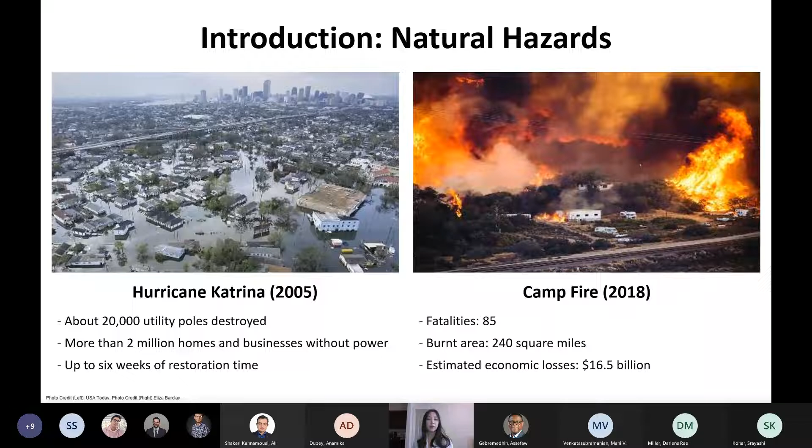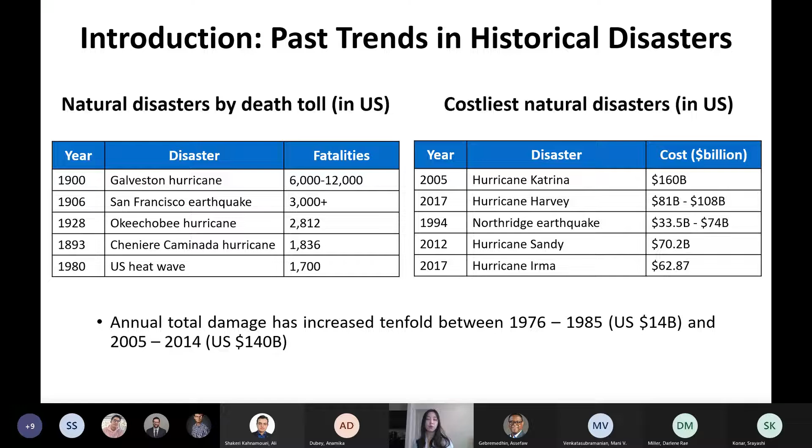And similar observations were found around the world. Annual total damage increased tenfold between the period from 1976 to 1985 and the period from 2005 to 2014, from $14 billion to $140 billion. Then what are the main causes for this trend? The possible answers to this question can be found in the next slide.

So the human losses resulting from natural hazards have decreased significantly over the last century due to improvements in building design standards and construction practices, improved disaster forecasting, and timely public warnings, all of which could be achieved through advanced technology and improved understanding of hazards. However, economic losses have increased dramatically in the past decades and are expected to increase in the future due to increasing risk, such as population growth and urban development in hazard-prone areas, as well as global climate change.

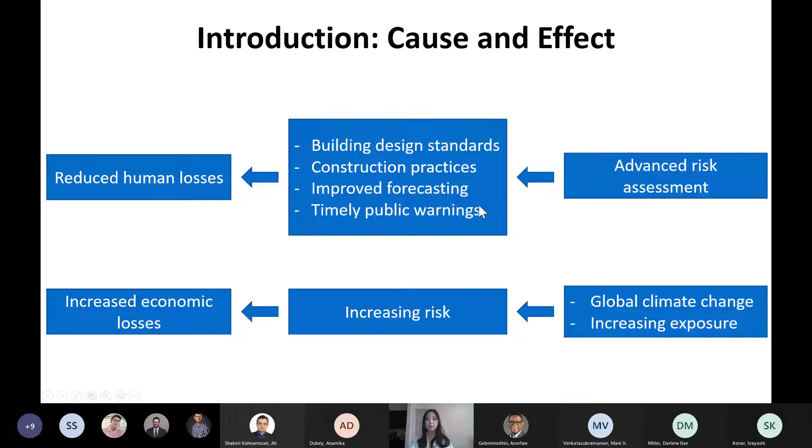And the importance of appropriate risk management and risk-informed decision-making for disaster preparedness can also be found from the comparison between the 2010 Haiti earthquake and the 2010 Chile earthquake. The January 2010 earthquake in Haiti had a magnitude of 7.0 and caused 230,000 fatalities. This earthquake destroyed Haiti's economy, and infrastructure had been recovered very slowly.

But by comparison, the magnitude of the 2010 Chile earthquake was 8.8, which was the fifth largest earthquake in the world since 1900, releasing about 500 times greater energy compared to Haiti's earthquake. However, Chile's death toll was 550 fatalities, which is 400 times less than the fatalities of the 2010 Haiti earthquake. Then how was it possible?

It was because Chile had a better understanding of the earthquake risk, which resulted in better building codes and earthquake-resistant construction before the earthquake event, and the strategic implementation of policies that address both the immediate recovery needs and long-term planning. As such, risk assessment and management play a vital role in reducing human and economic losses, as well as the social disruptions from disasters.

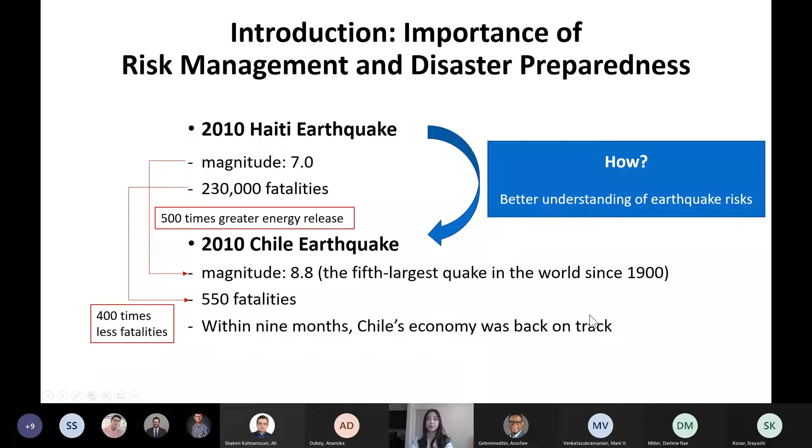Okay, then before talking about the risk assessment, we first need to define risk. And risk is a combination of three components, including hazard, exposure, and vulnerability. And hazard is a potentially destructive physical phenomena, including the natural and man-made hazard, such as earthquake, hurricanes, tornadoes, flooding, wildfires, tsunami, volcano eruption, and even the intelligent attacks.

And exposure is the elements at risk that could be affected by the hazard, including the people, buildings, infrastructure, and the environment. And the vulnerability is the likelihood that elements will be damaged when exposed to a hazard. So for example, a building with multiple stories will be more vulnerable to the ground shaking from earthquake than a one-story building. And another example is that an elderly person may be more vulnerable to the impacts of flooding because he or she has more difficult time in evacuating or moving quickly. Therefore, in order to assess risk, these three components should be defined first.

So from an engineering viewpoint, the risk-informed decision-making has the four basic steps: risk identification, risk modeling, risk assessment, and risk management. So in the first stage, we can identify the three risk components, which are hazard, exposure, and vulnerability, as I mentioned in the previous slide. And then the second step is to develop or simulate the stochastic models of the identified risk components.

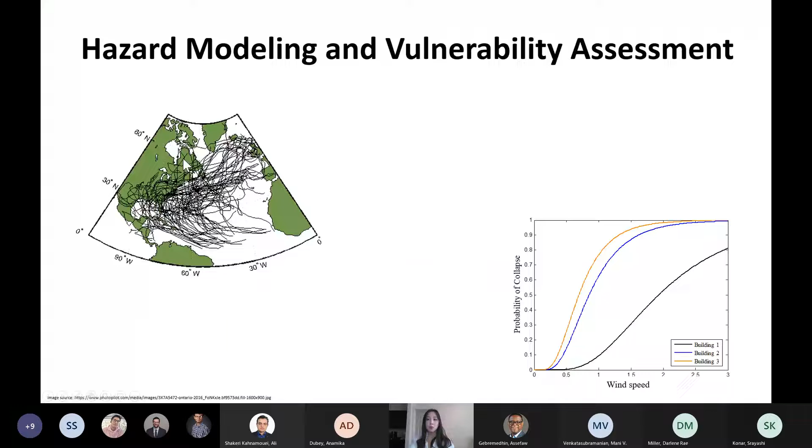And to model the hurricanes, we can generate a large number of hurricanes from their initiation over the Atlantic Ocean to their final dissipation after making landfall. So we can record the number of hurricanes hitting the community per year, and then we can also record the intensity of each hurricane. So this is the procedure for generating the stochastic set of hurricanes.

And then we also have to investigate the vulnerability of the buildings. And then we also have to consider some vulnerability of the people and the natural environment. But during this presentation, I'm gonna focus more on the physical aspect of the community. So here, the vulnerability of the buildings can be represented by the fragility curve. And I'm going to talk about the fragility curve in more detail later in this presentation. But here, each building has different vulnerability due to its own dimension, like the floor plan, layout, construction material, and different structural behavior.

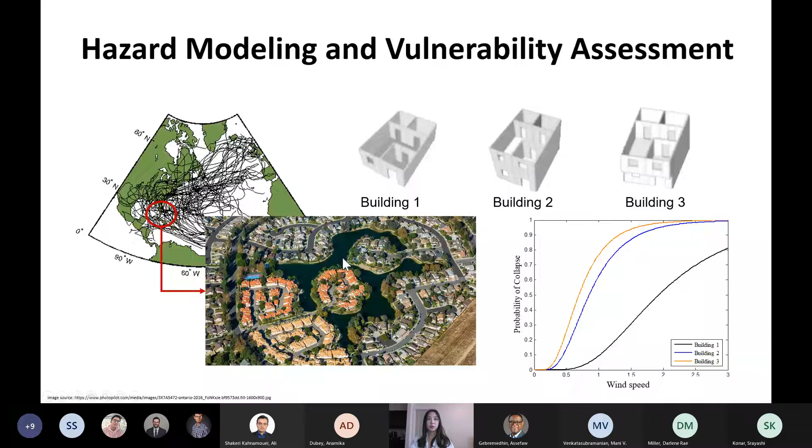And then the final step is the risk management. So we can make some decision based on the risk assessment and other constraints for the purpose of mitigating risk and/or improving the resilience of the community.

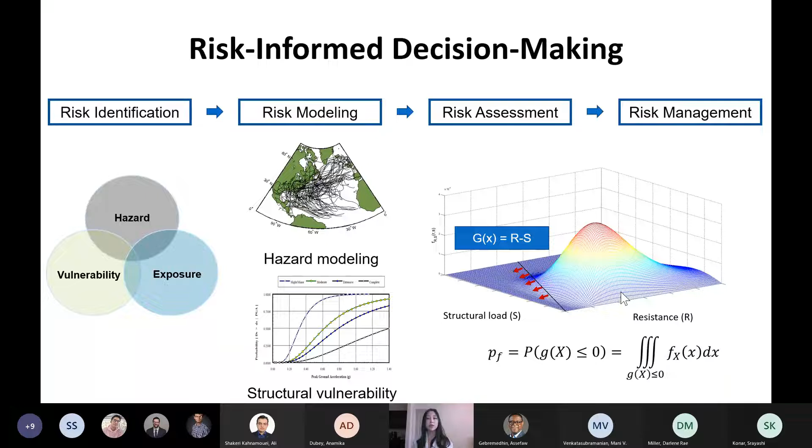And as many of you have already heard, resilience is a hot topic in many different disciplines. And the concept of resilience has received great attention in recent years due to the repeated natural hazards and their high consequences to humans and the built environment.

So resilience can be broadly defined as the ability to prepare for and adapt to changing conditions and withstand and recover rapidly from disruption. And resilience capacity can be classified and categorized into these three parts. So first, absorptive capacity is the capacity of the system to absorb and resist the impact of perturbation and to minimize the negative impact of the disruption.

And second, adaptive capacity is defined as the ability to successfully respond to future changes and conditions by adjusting to potential damages and taking advantage of opportunities. And lastly, the restorative capacity is the ability of a system to be restored quickly and efficiently in case the absorptive and the adaptive capacities are not sufficient, and the system cannot maintain an acceptable level of performance. Then how can we quantify the resilience of the system?

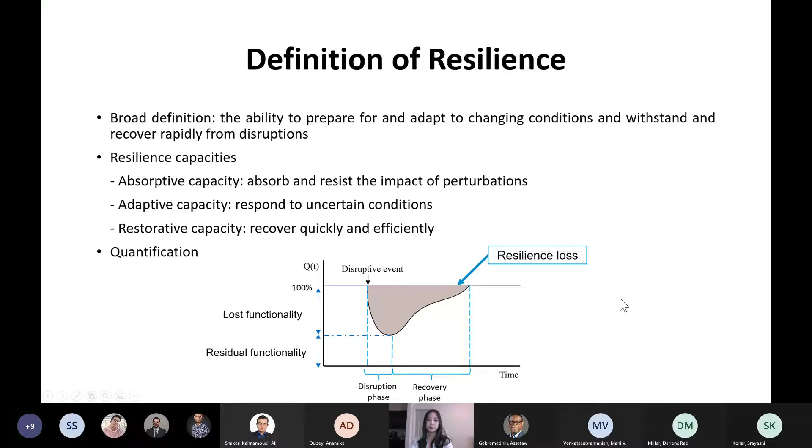In today's seminar, I'd like to introduce one of my recent studies on multi-component resilience assessment for a supply chain system to illustrate how risk and resilience assessment can be used at the system level. Although this new resilience assessment framework will be illustrated with a supply chain system, the general framework I'm going to propose can be applied to other types of infrastructure systems, such as electric power grids, water distribution systems, transportation systems, and so on.

Okay, then what is a supply chain system? A supply chain is a complex network system involving the whole process from the production of source material to the delivery of a completed product to the end users. It also includes all the individuals, resources, technologies, organizations, and activities in this process. Here I'm going to focus more on the physical aspect of the supply chain system.

The supply chain system can be modeled as a graph consisting of different sets of nodes and links. As you can see from this figure, the supply chain has different types of nodes, such as the raw material production node, refinery, oilseed crusher, or storage, and the final destination node, and the links between the supply chain nodes are the transportation routes to deliver the product from the raw material production node to the final destination node.

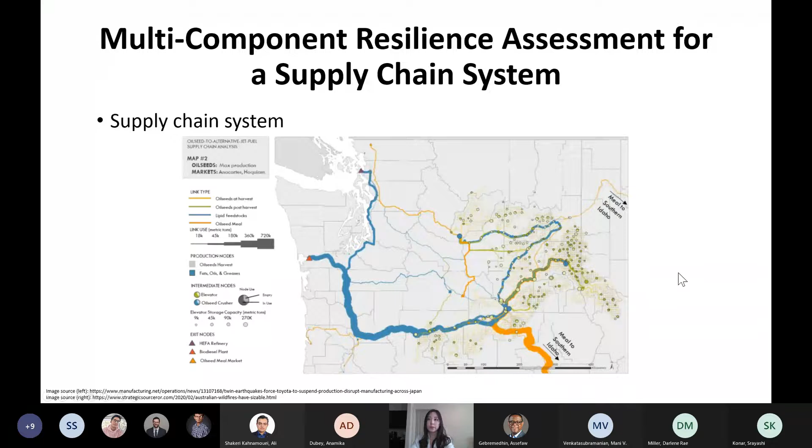Earthquakes or other extreme natural hazard events may seem like rare events, but the geographic spread of supply chains across a larger region increases the possibility of the system being exposed to such hazards. Moreover, due to this geographic spread, each part of the supply chain may experience different types of risk factors. So let's suppose that the supply chain system is located in the Pacific Northwest region, and many different events can occur simultaneously.

For example, because Seattle is located in a high earthquake area, this portion of the supply chain system can be attacked by a magnitude 7.2 earthquake event. Climate change may affect the frequency and severity of drought inland, and some of the feedstock nodes could be affected by droughts. At the same time, demand may increase due to local market competition, and some facilities may shut down due to unexpected events. So a supply chain system can be affected by many different types of uncertain events and conditions due to its geographic spread, and it can be more clearly shown in the global supply chain system.

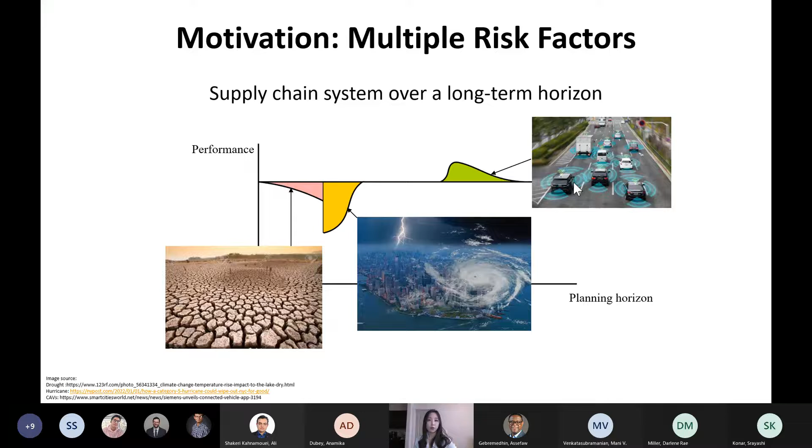Okay, so as introduced earlier, most existing resilience studies have focused on a single type of natural hazard and developed resilience enhancing strategies to minimize the negative consequences of the hazard event. So for example, here we consider only a single occurrence of a hazard event and we try to minimize the resilience loss. And moreover, it starts with a what-if scenario. So rather than considering the uncertainties in the time of occurrence of the hazard event, it just assumes that a hazard event occurs and then tries to minimize this resilience loss. However, there might be some possibility that there will be multiple events over the planning horizon.

So this study addresses the shortcomings found in the existing and conventional resilience assessment approaches by considering the multiple types of events and conditions that may occur during the planning horizon. So as shown in this figure, this study considers the whole planning horizon and quantifies the impact of each risk factor on the supply chain performance so that we can consider the absorptive, adaptive, and restorative capacities of the system. And by doing so, contrary to the conventional approach, this study not only mitigates some negative impacts, but also capitalizes on opportunities that some future events will bring about.

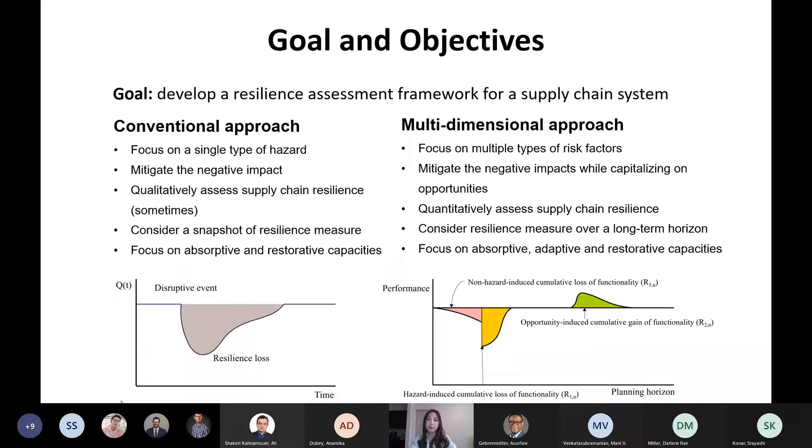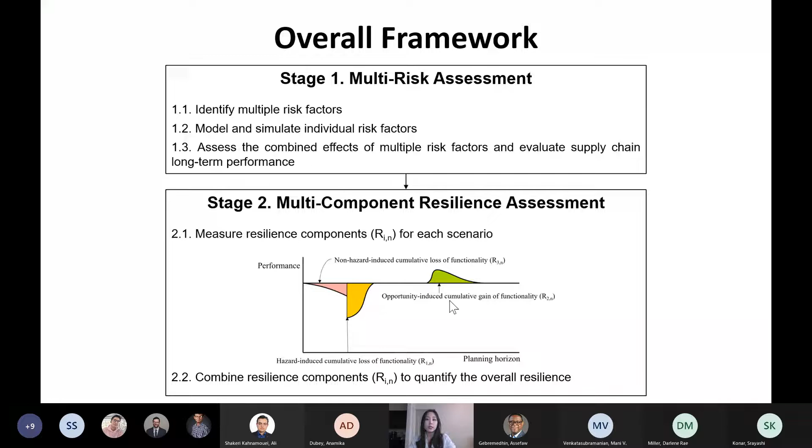Okay, so this slide shows the general procedure for this proposed approach. So this framework consists of two stages, multi-risk assessment and multi-component resilience assessment. So the first step is to identify the risk factors occurring at different points in time and space, model and simulate the individual risk factors, and combine them to evaluate the supply chain long-term performance. And in the second stage, for a given scenario, as shown in this figure, the three resilience components are measured, and I'm gonna talk about these three different resilience components later, and then combined to quantify the overall resilience index of a supply chain system. So I'll go into more detail about the step-by-step procedure.

And because most of these events and conditions are problem and site specific, they should be identified based on the type and location of the supply chain of interest. In other words, if we consider supply chain A, then we have to identify the different risk factors that may be the most appropriate to this supply chain A. And then if you're gonna analyze the risk for supply chain B, then we have to completely do this analysis specifically for supply chain B, because it may be exposed to different types of uncertain events and conditions over the planning horizon.

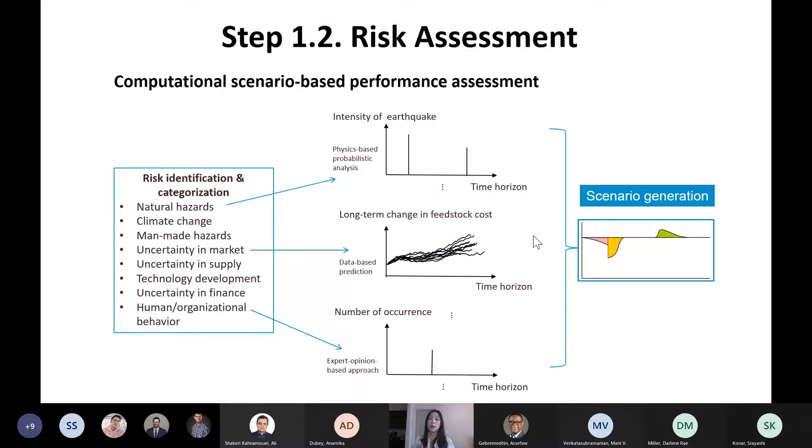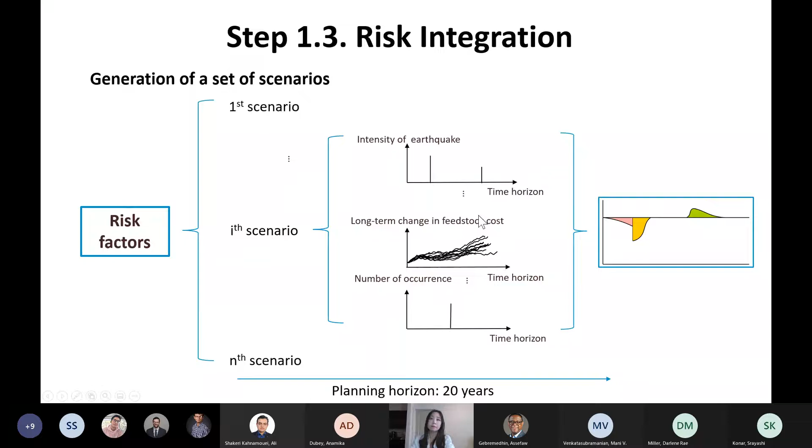So this is the procedure to generate only one of the many plausible future scenarios, and then this procedure should be repeated until a sufficiently large amount of future scenarios are generated. Okay, now we need to talk about how we can measure the supply chain performance. In the conventional approach, either the unmet demand ratio or the total cost is a commonly used performance measure.

And the resilience cost has four different components, including the unmet demand penalty, the restoration cost, and the changes in the transportation cost and the operation cost due to the risk factors. And the reward function is used to assign the reward for demand surplus to account for some system redundancy. So this term may not be an actual economic benefit that the system produces, but more like a benefit obtained by meeting the minimum target demand under any uncertain scenario in the form of redundancy or backup.

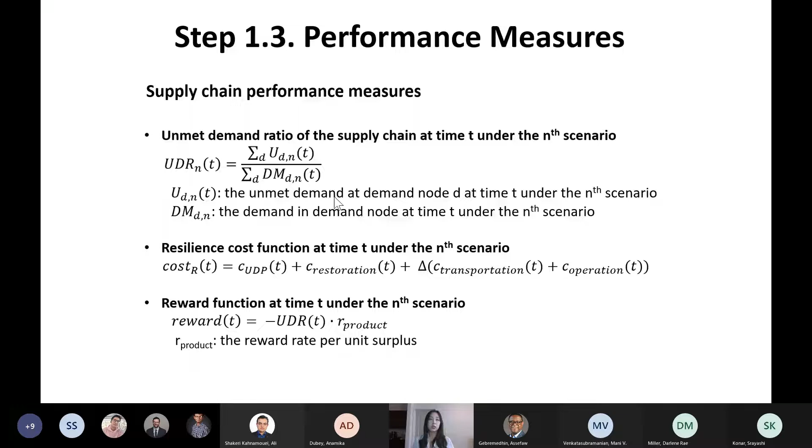So as you can see here, all these performance measures are scenario dependent and time dependent. Because the performance changes over time due to uncertain events and conditions, all of these performance measures are time dependent. And because the long-term system performance varies across the scenarios, they are scenario dependent. After predicting the long-term performance of the supply chain under each scenario, we can compute the three components of the resilience for each scenario.

So here, the first resilience component is the hazard event-induced cumulative loss of functionality. When we look at the long-term performance of a supply chain system, we can see this yellow area, that is the hazard event-induced cumulative loss of functionality. So if the negative performance is induced specifically by some extreme natural hazard, then we say that this portion is a hazard event-induced cumulative loss of functionality. And because the number of hazard events over the planning horizon is uncertain, here I, the number of events over the planning horizon for a given scenario, is also a random variable.

And if the negative performance has been induced by some non-hazard events, then it can be classified as the non-hazard induced cumulative loss of functionality and can be calculated by using this equation. And if some positive performance has been induced by some kind of opportunities, this green area can be calculated by using this equation, and this is the second resilience component, opportunity-induced cumulative gain of functionality.

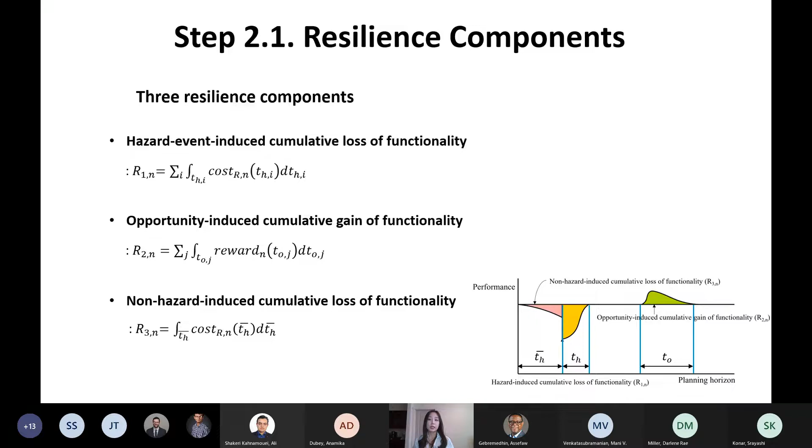Then why do we have to measure the overall resilience of the supply chain by using these three discrete resilience components? The main reason for measuring these three resilience components separately is that we can identify which risk factor contributes the most to the supply chain performance and what to target to improve the supply chain resilience. And finally, these three resilience components can be combined together to calculate the overall resilience index. Here the weighting factors are assigned to each of the resilience components and can be determined based on the decision maker's preference toward each resilience component.

Every scenario has its unique long-term performance because of the uncertain events and conditions over the planning horizon. And in turn, this resilience index will be different for every scenario. Therefore, the final form of the overall resilience of the supply chain is not a single value, but it can be represented by the expected value, the probability density function, or the cumulative distribution function.

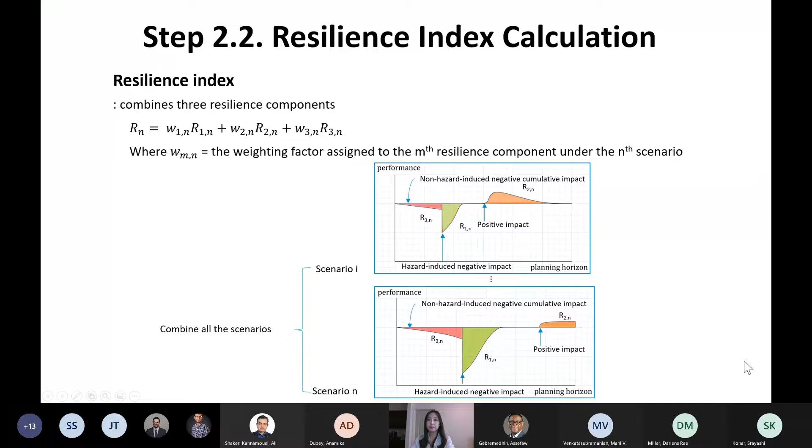Now, the proposed multi-component resilience assessment framework is applied to a hypothetical forest residual to sustainable aviation fuel supply chain system. We applied this proposed framework to this specific sustainable aviation fuel supply chain system because this study has been funded by the Federal Aviation Administration. But as I mentioned, the general framework can be applied to any other types of infrastructure systems like the power grid system, transportation system, or the water distribution system.

So this hypothetical system is located in the three states, Washington, Oregon, and Idaho. And as shown in this figure, this system has three different types of nodes: the raw material production node, the processor node, and the destination node. And between the supply chain nodes, there are some transportation edges.

The forest residuals are used as the feedstock for fuel production and converted into jet fuel and road fuel through the GFT conversion processes. The jet fuel and the road fuel are delivered to the two types of destination nodes, the airport and the road fuel market, respectively.

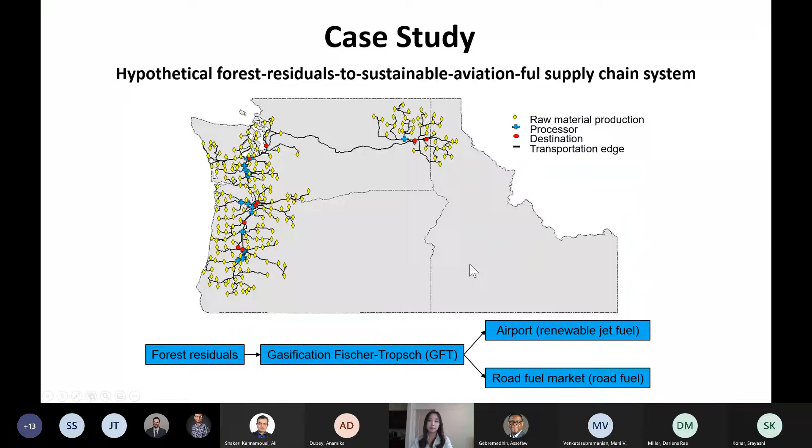Based on its location and characteristics, we identify three key risk factors for the purpose of illustration. Earthquake is considered a major natural hazard that can induce a sudden reduction in the performance of a supply chain system. An increased amount of forest harvest will be considered an opportunity, which can bring about some positive performance. And the GFT catalyst deactivation will be considered one of the major non-hazard events causing slowly decreasing performance over time.

For the rest of the presentation, I'm going to focus more on the earthquake modeling and the earthquake risk assessment, because the other two risk factors are supply chain specific. However, the earthquake modeling and risk assessment can be applied to any other type of large-scale infrastructure system subjected to earthquake events.

Okay, so this is a seismic hazard map for the entire United States, and the supply chain nodes are layered on top of the seismic hazard map. As you can see, within this rectangle, the supply chain system is located in Washington, Oregon, and Idaho. The colors indicate the level of seismic risk. For example, the area with the hottest color will experience damaging shaking most often, such as the west coast of the United States.

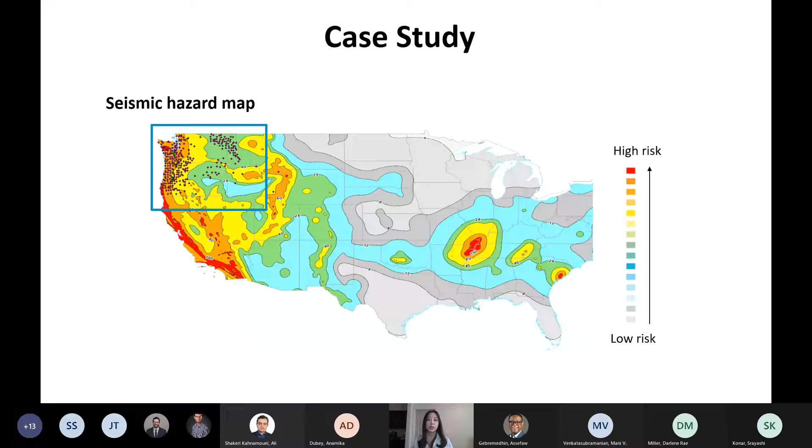To stochastically generate plausible earthquake scenarios, we first identify seismic faults. In this study region, there are 69 faults and fault segments, and we generated 25 seismic events per fault using the importance sampling technique. Therefore, a total of 1,509 earthquake scenarios are included in a small but still representative catalog, the stochastic catalog.

For each earthquake event, a ground motion map can be generated. The ground motion map shows, if the earthquake occurs at this specific seismic fault, how the ground motion shaking intensity will be distributed around that area. Each of the points in the study region will experience a different earthquake ground motion intensity.

Here in this case study, we specifically relate a specific earthquake event to a specific ground motion map, but actually there are a lot of different uncertainties in generating this ground motion map. So we cannot just make a deterministic relationship between a specific earthquake event and a specific ground motion map. But for the purpose of simplicity, we assume that if we know a specific earthquake event, then we also know the resulting ground motion intensity map.

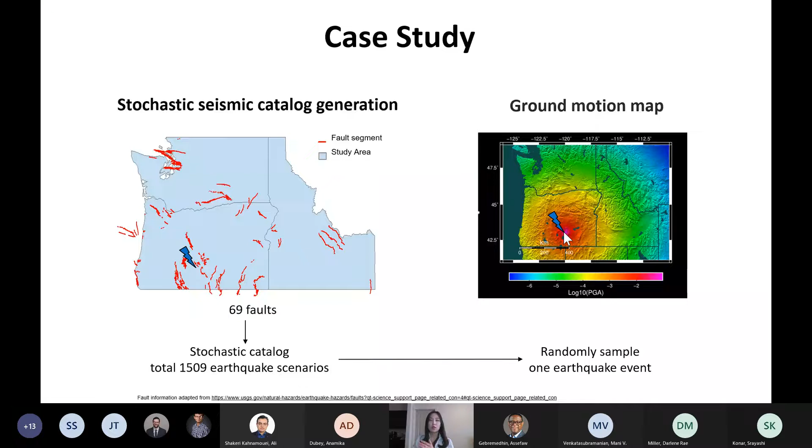And then the seismic fragility curve is introduced in assessing the structural damages to each node and link in the supply chain system. So fragility curve represents the vulnerability of the facility and the transportation link. And as I mentioned at the beginning of this presentation, each supply chain node and link will have its own fragility curve because of the different structural characteristics.

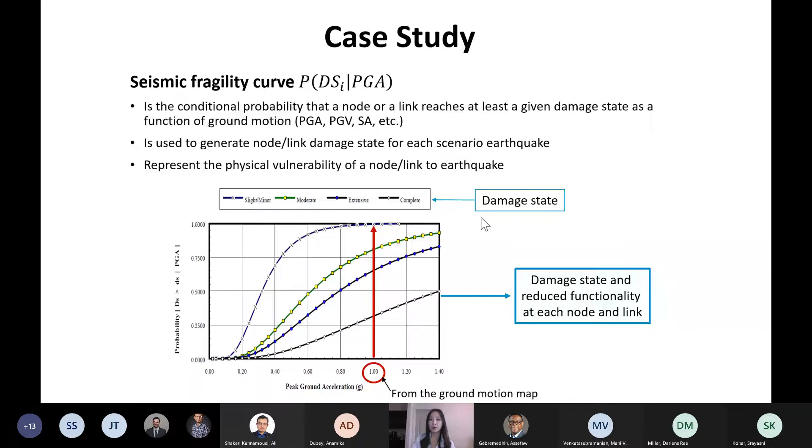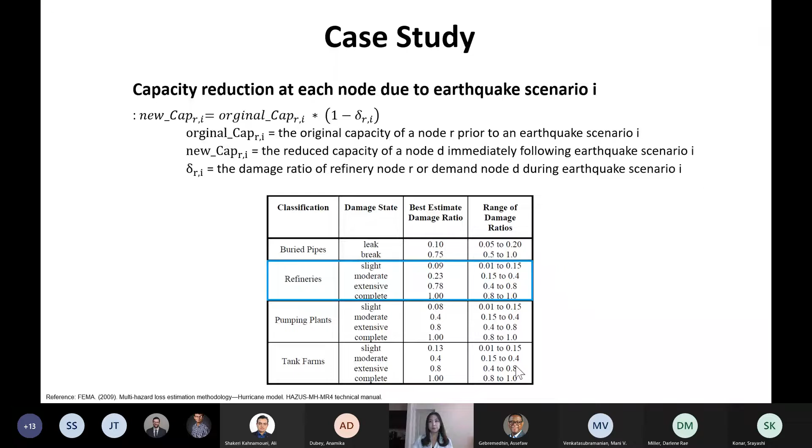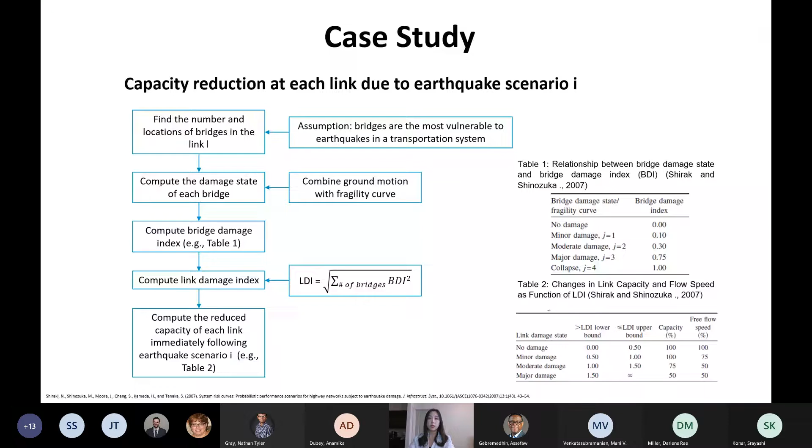And then again, we need to repeat this procedure for all the bridges and all the links in the supply chain system, and then input the reduced capacity of nodes and links into the supply chain optimization to recalculate the supply chain system performance immediately following an earthquake event, which means that all of this procedure can generate only one single point immediately following this earthquake event.

And if we want to draw the post-disaster restoration curve, we can just repeat this procedure. So after repairing some of the bridges and facilities, we can update their capacities and plug the updated capacities into the supply chain optimization to assess the supply chain performance. Then there will be another single point on the post-disaster restoration curve.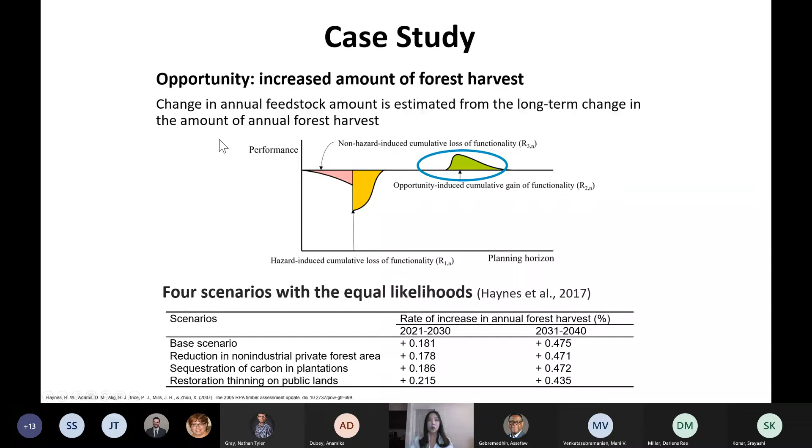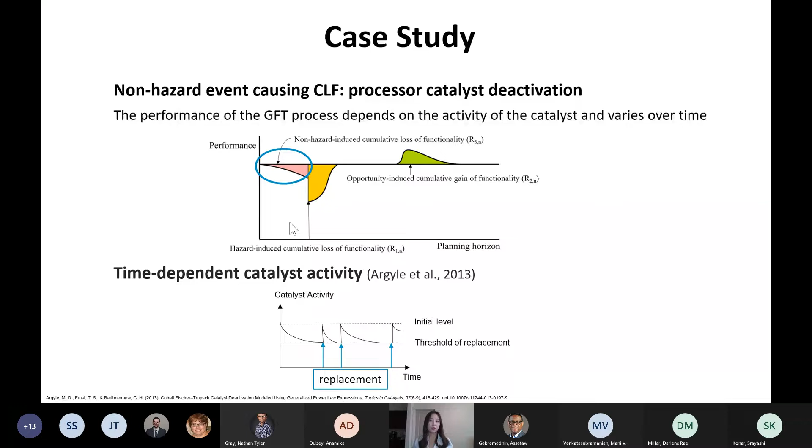So I will just skip the explanation about the opportunity and the non-hazard events causing the cumulative loss of functionality, because as I mentioned, both of them are supply chain specific risk factors. And by combining these three risk factors, we generated a set of plausible supply chain performance scenarios. Each of the light gray lines indicates one possible scenario. And now let's just focus on only one sample scenario, which is the blue line.

And as mentioned earlier, the unmet demand ratio is primarily used to distinguish between the three different resilience components. If no risk factors occur over the entire planning horizon, then this UDR will be just zero and constant over time. So this is the baseline scenario, and by comparing this baseline scenario with the sample scenario, we can identify the time blocks that can be applied to the first, second, and third resilience components.

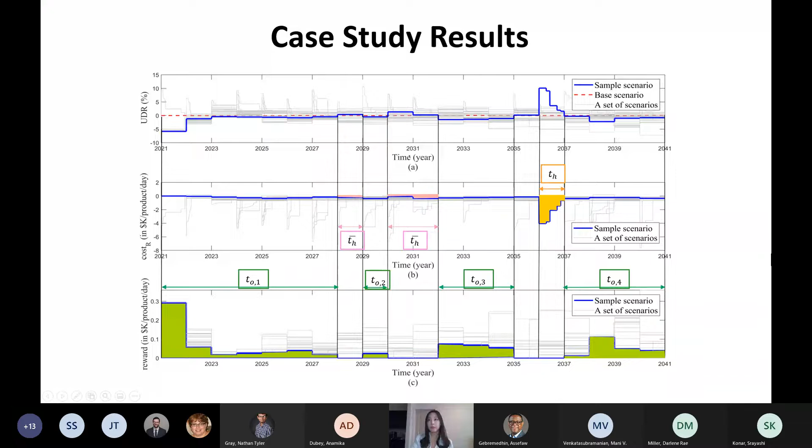And the final output of this analysis is the distribution of the resilience indices calculated for all scenarios. So as mentioned earlier, the weighting factors assigned to each resilience component can be determined based on the decision maker's preference. So we perform the sensitivity analysis of the resilience index to the weighting factors, and it is shown in the left figure. It shows the cumulative distribution function of the resilience indices when they are subjected to two different sets of weighting factors.

So the red curve indicates the CDF of the resilience index when equal weighting factors are assigned to all the resilience components. And in this case, the earthquake impact on the overall resilience index is considered insignificant because of its relatively short duration and low probability of occurrence.

And to avoid such underestimation of earthquake-induced impact on supply chain performance, we propose different weighting factors for different resilience components. This weighting factor is proportional to the consequence of each risk factor for a given unit time. So by doing so, we can consider the frequency, magnitude, and duration of each risk factor.

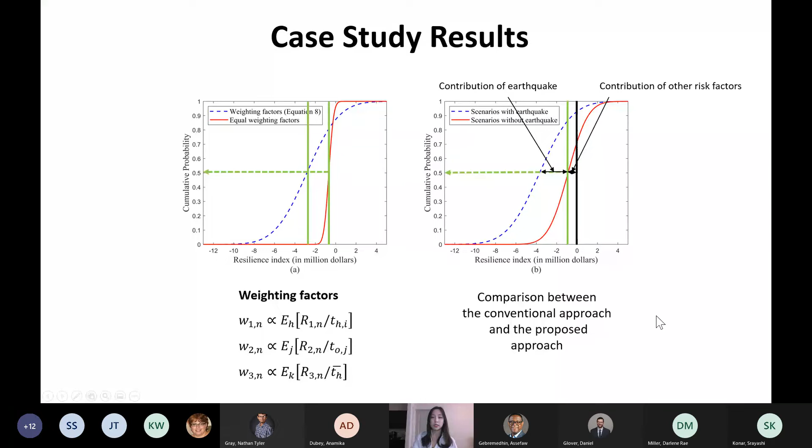So in conclusion, this study proposes a quantitative multi-component resilience assessment framework for a supply chain system that considers multiple events and conditions occurring over the planning horizon. And we provided more reliable estimates of the system functionality under a wide range of plausible future scenarios by considering multiple conditions and uncertain events that can occur over the planning horizon.

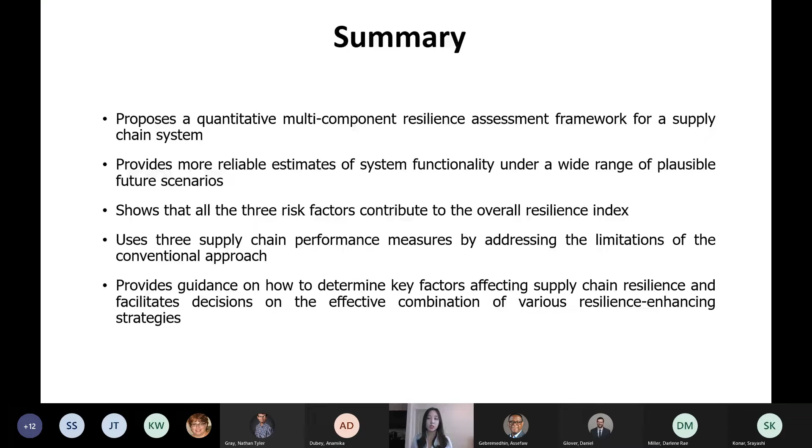So the case study results can provide some guidance on how to determine the key factors affecting supply chain resilience. And it can also give us some guidance about how to effectively combine various resilience enhancing strategies in the maintenance and operation stages.

So here the severity of the disruptive events can be explained by the magnitude of the lost functionality. Actually, the magnitude of the lost functionality is determined by the combination of the severity of the disruptive event as well as the vulnerability of the system. If the severity of the disruptive event becomes greater, of course the loss of functionality magnitude will become greater. So this can be explained by the loss of functionality, and it can be considered as part of the resilience loss.

Okay, sounds good. Any follow-up question from Mani, do you have any follow-up question?

Okay, so the other one, Jiyun, we have is for risk assessment and quantification. So the question is, is the risk quantified over the entire region of the PDF that you showed? How is the resistance defined?

So could you please repeat the question? I'm also looking at the chat, and it seems that maybe it was the question asked at 11:18 a.m., right? For the risk assessment and quantification. Yes, it's in the beginning. So when you are talking about the probability density function, the question was, is it computed over the entire region of the PDF, or how are you quantifying the risk specifically from the PDF? So what do you mean by the resistance here? The resistance of the system?

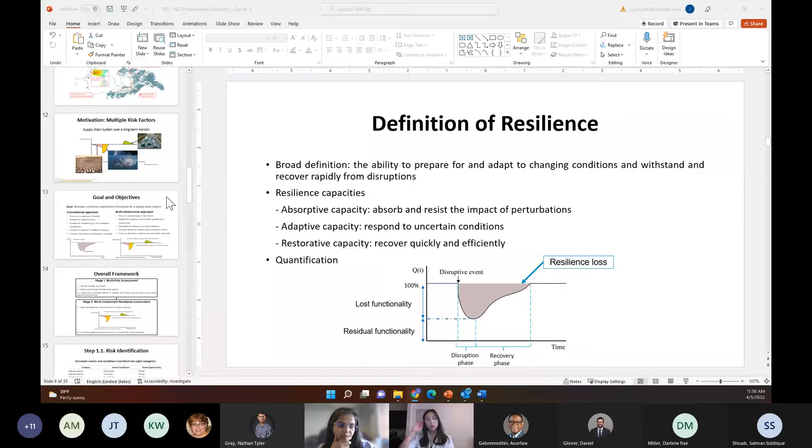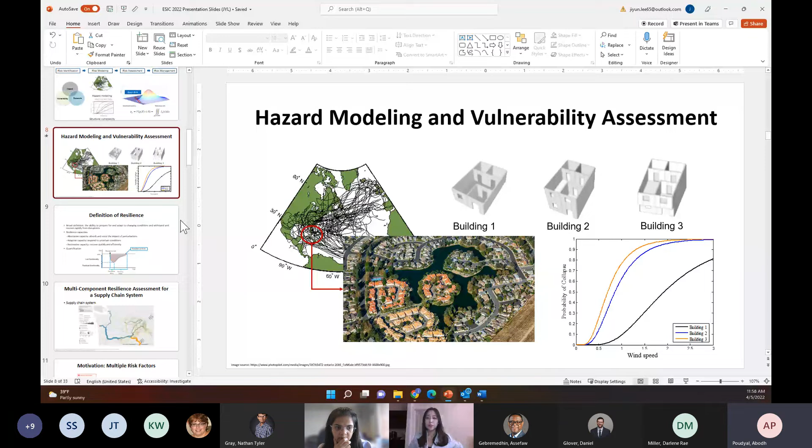It's on slide 8. If you go to slide 8. Slide 8. Yeah, actually, I'll turn my mic on. So it's actually before this slide. Oh, yeah, slide number 7. Yeah, sorry about that. So in the last one, you define the risk assessment. How do you quantify the risk here? Did you calculate it based on the entire PDF region, and also the resistance that you have written? How is it calculated?

So here, the resistance is the building capacity or the building resistance. So if the external factor is applied to the building, how much structural loading this building can withstand, that is the resistance. So normally, in order to study the resilience of the building or some kind of physical facility, we have to perform some finite element analysis and nonlinear dynamic structure analysis to see how this building behaves when a specific structural load is given.

So in order to determine the resistance, the structural load should be the input, and then we can find some corresponding resistance, because the resistance is the building capacity when a specific structural load is given. So it will require some structural engineering knowledge to study the resistance part of the system. Yeah, sure. Thanks. No worries.